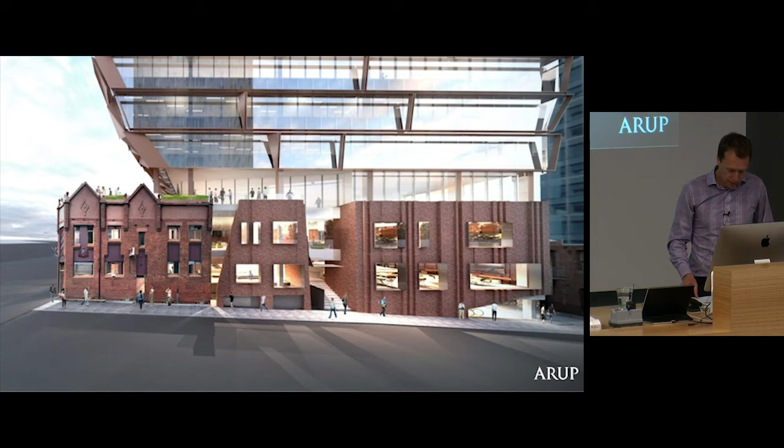So, what does a pub, a religious mission hall and a brothel have in common? That was the joke I was going to start with, but I'm not going to because I'm an engineer.

This is a corner of Melbourne in the 1800s, upon which stood the now heritage listed Elms Family Hotel, which was originally built in the 1850s as the old Governor Bourke. Next door is the heritage listed City Mission, originally a dance hall built in 1871, and behind those 17 Casselden Place, a former cottage and most likely brothel that is also heritage listed.

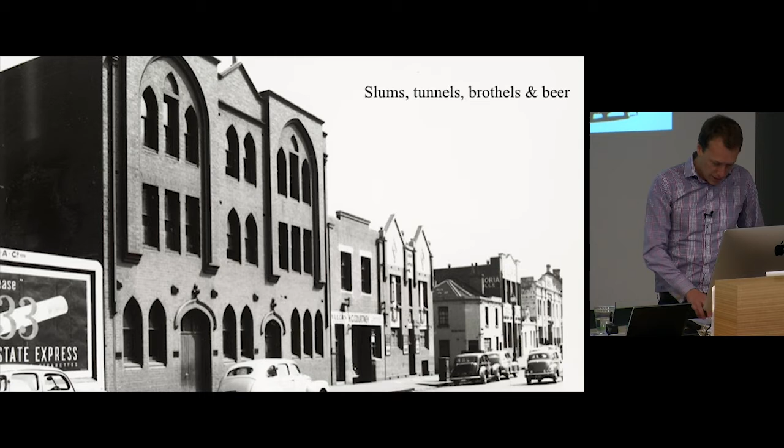They're all located on the corner of Melbourne City Grid, for those that aren't from Melbourne, up on the corner of Spring Street and Little Lonsdale, and those of us from Melbourne affectionately call the area Little Lon. So, it's a part of Melbourne's landscape that really is rich with history and tells a story of Melbourne through the last century. The subject buildings and laneways are considered the largest intact portion of Melbourne's notorious 19th century red light district, and we're in an area of substandard housing, poverty, brothels, hotels and workshops.

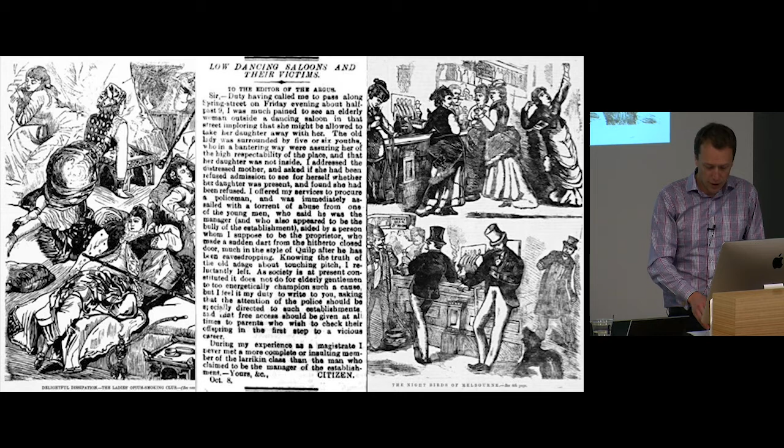Fast forward to our recent excavations, and thanks to engaged archaeological consultant GML Heritage, who carefully excavated the top metre of site, a lot of interesting things were found. Very old and once expensive champagne and wine bottles, coins, some Aboriginal artefacts, as well as all sorts of other interesting paraphernalia. I don't expect you can read this article, but if you can, it's a letter from a gentleman who had an altercation outside the now Mission Hall, trying to express concern for the welfare of the women inside and the daughter of a woman who was on the street trying to get her out.

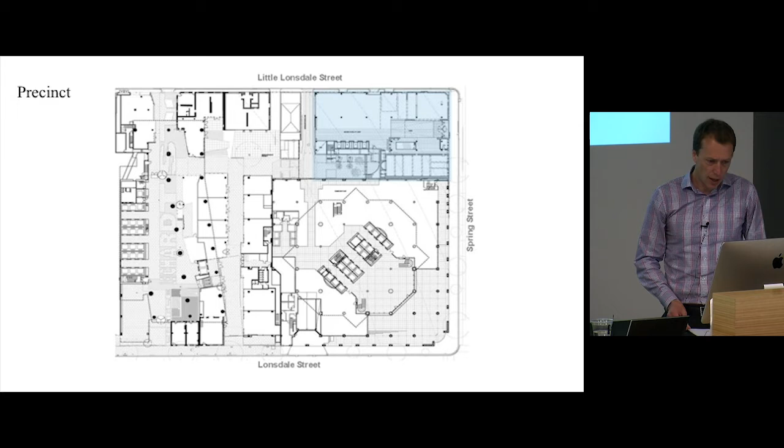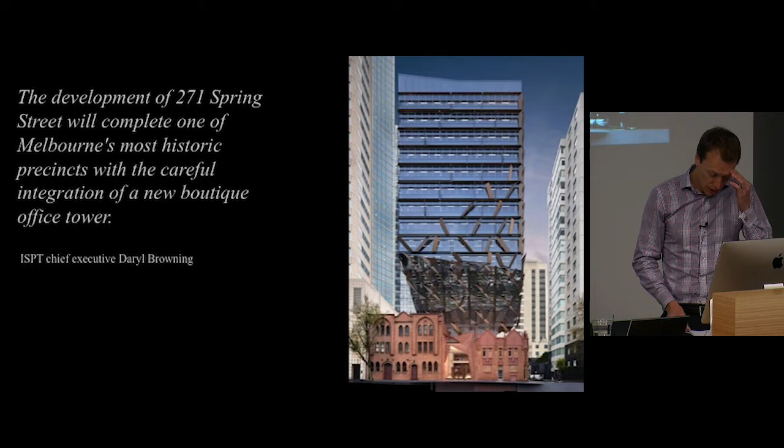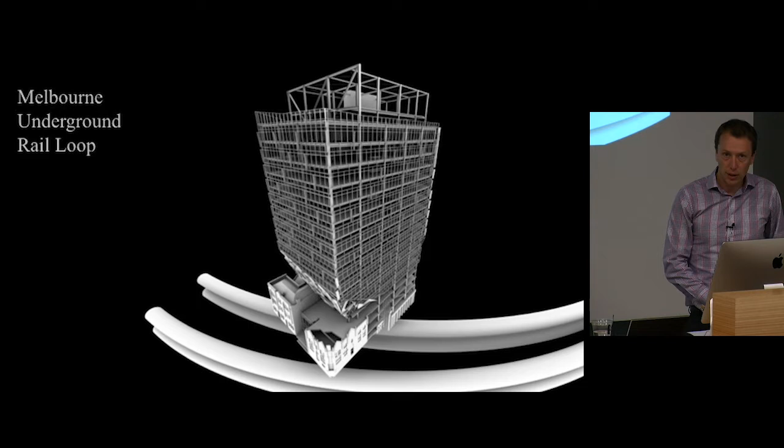This here is a sneak peek of where my presentation is headed. It's a render of the Spring Street elevation of the John Wardle and Arup collaboration, alongside heritage architects Bruce Trethowan, and encircled by the buildings that I've been discussing at the lower level. So, I've touched on the history and above ground built conditions, but with all the character above ground, why are you listening to a structural engineer? The answer is that there was a lot going on at ground level and below ground as well.

So, Melbourne's two alignments of double-stacked city loop underground rail tunnels, as you would have seen in the previous image, and I'll show you in plan, ran directly beneath the site. To top of tunnel, they're about 17 metres below natural grade. To top of the easement, about 10 metres, and when you go down into our basement, the easements are only 6 metres below us. There are 3 electrical easements, or 6 if you include the accesses over. There's a substation serving the precinct, 2 major conduit runs and the accesses over, and there are 2 rights of way as well. Alongside those, there are the existing heritage buildings that I've discussed.

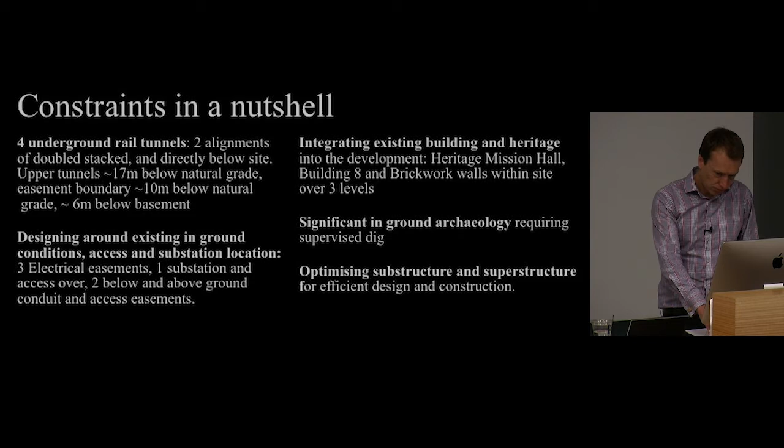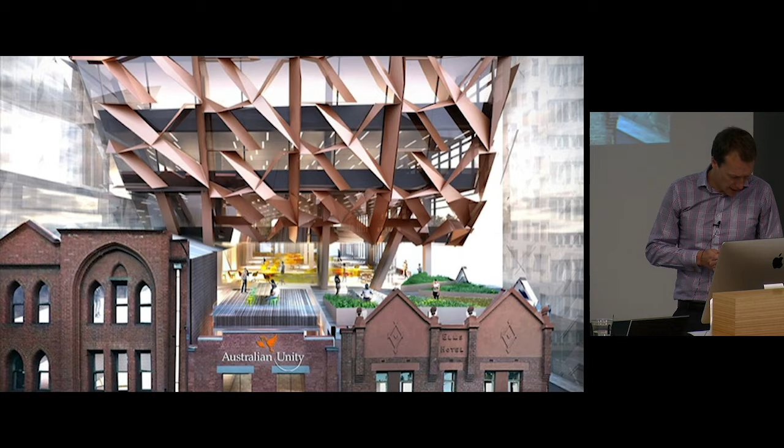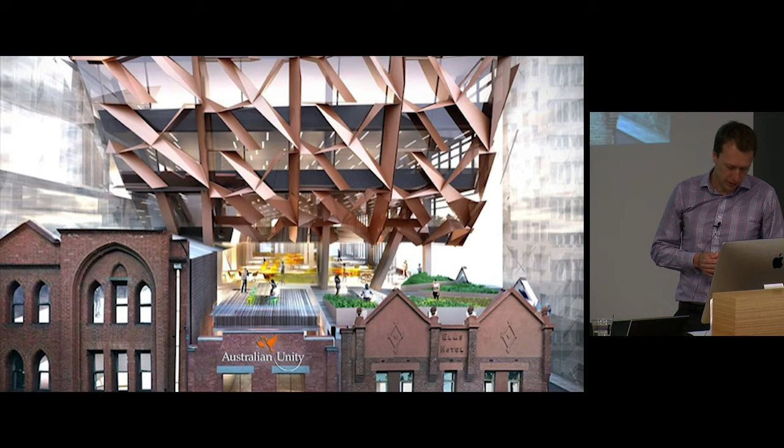So, it was in 2012 when Arup and ISPT first came together to discuss this development. ISPT had been working on the site for a number of years looking at various options, which for all sorts of reasons they hadn't been able to realise. It was at this point that we were fortunate enough to be given the opportunity by ISPT, and John Wardle Architects, to look at what an engineering-led solution might look like. So the question is, what did we actually do?

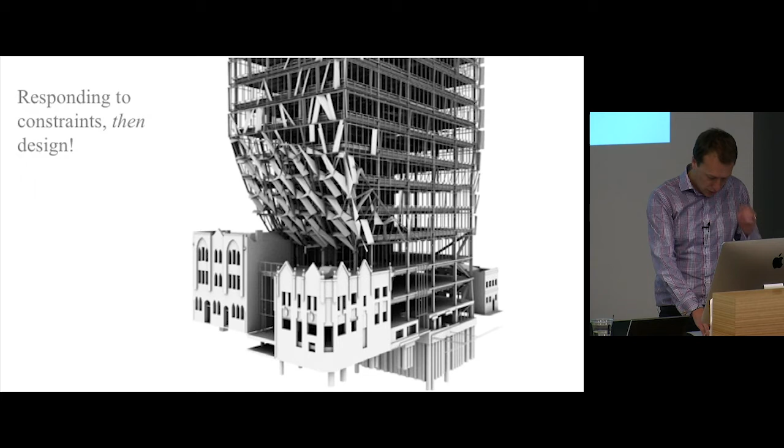So collaborating with our architectural friends, our aspiration was really simple on behalf of ISPT. It was to bring an approach to the project that would enable a development that was commercially viable, that could be built such that rents could be reasonable and they could find a tenant for a significant building on the site. Arup provided all engineering services: structural, civil, geotechnical, building services, facade, fire, ESD, acoustics, traffic and vertical transportation. So full suite of engineering services.

Our intent from the outset was to approach the consideration of structural and foundation solutions that would respond directly to the site's constraints and then inform the design. This is somewhat in contrast to perhaps a traditional approach in which a design solution is based on NLA, fit-out requirements or aesthetics and placed onto a site, let's say.

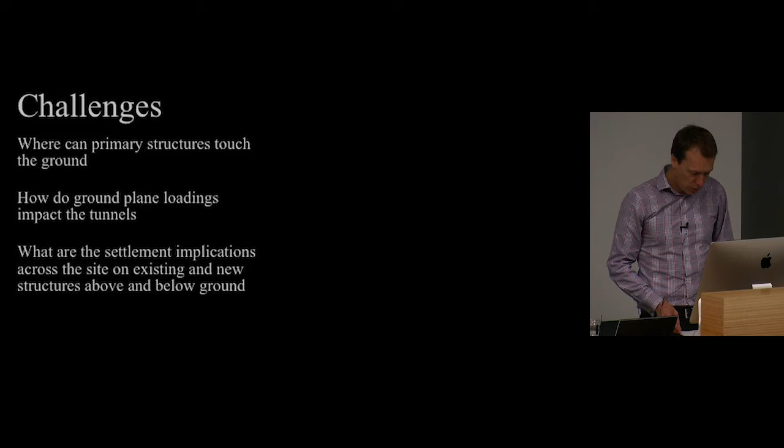So what were our challenges in structural and geotechnical terms? Where can primary structures touch the ground? How do ground plane loadings impact the tunnels in particular? And what were the settlement implications of the foundations we were putting down onto the ground, and what did that mean for the various heritage and brittle brickwork structures around us?

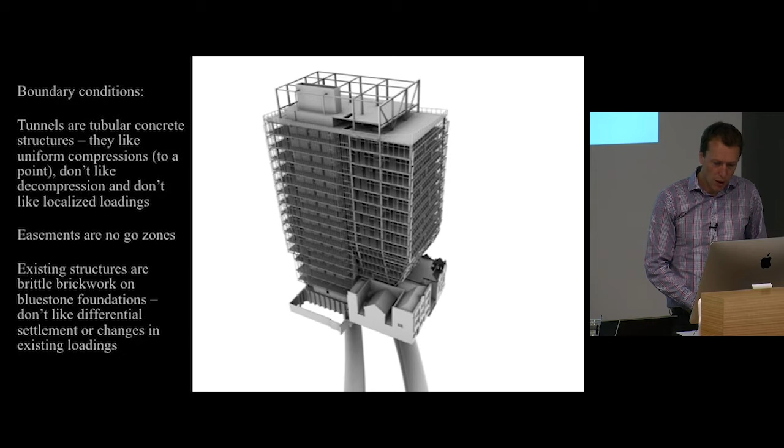To use a mathematical term, our approach was driven by these boundary conditions. Tunnels are tubular concrete structures. They like compression, they don't like decompression, and they don't like localised loads. Easements, as we know, are no-go zones, and existing structures, as I said, were the brittle brickwork on very old bluestone foundations, and they certainly don't like moving around.

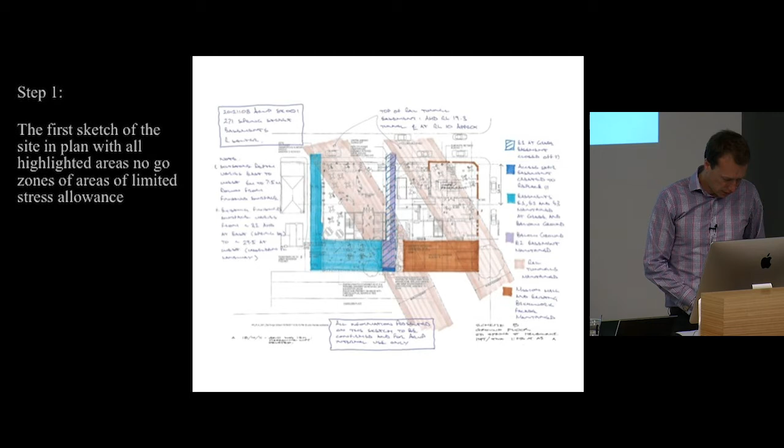We assessed the maximum and minimum stress that could be placed on the underground city loop tunnels. We identified and challenged the areas of the ground that we could and couldn't touch based on these easements, and we assessed and identified areas of ground and the site that we could and couldn't touch on the basis of heritage buildings, facades and archaeology.

This sketch looks pretty rudimentary, but I'm particularly proud of it because it was produced by me only a few days after we first opened discussions with ISPT, and it gives you a good indication of the constraints to the site. The site's bounded by the blue line on the left and the brown lines on the right.

The city mission is in the bottom right-hand corner, substation bottom left, easements running up the page in blue, heritage facades wrapping around, and the two city loop alignments diagonally running across the page. So that was our site, and you could see to some extent why it hadn't been developed previously. So the process was to be one of iterative optioneering of structural framing and foundation concepts that responded to these boundary conditions and constraints.

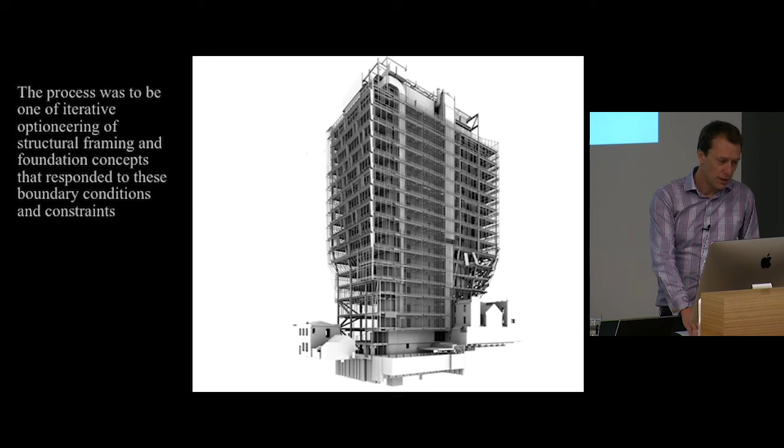An obvious consideration, but one that is sometimes overlooked in ensuring superstructure construction and norms are adhered to, is the self-weight of various construction types. The benefits obviously lie in reduced foundation extents, but are emphasised when it is imperative that ground pressures are minimised and limited founding locations are available.

This study led us to consider numerous options for the building's structural materiality. Traditional reinforced concrete at the heaviest end of the spectrum, lightweight concrete products, steel and timber at the other end. The impacts on various superstructure elements also needed to be carefully considered due to the requirement for raking structures and their associated kicking forces, as well as the need for transfers and open spaces, obviously at the lower levels.

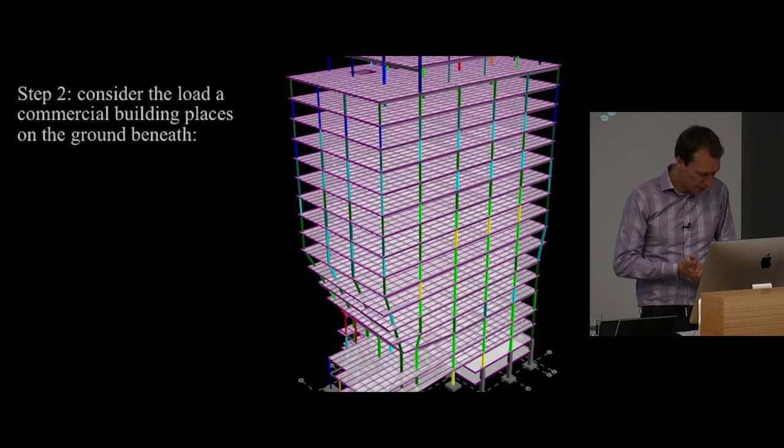We converged on a composite steel and concrete solution, combining relatively lightweight construction with buildable geometric flexibility and an ability to easily integrate bracing. If not considered carefully, the drawback of lighter weight construction, as the structural engineers in the room will know, can be acoustic and unwanted dynamic responses.

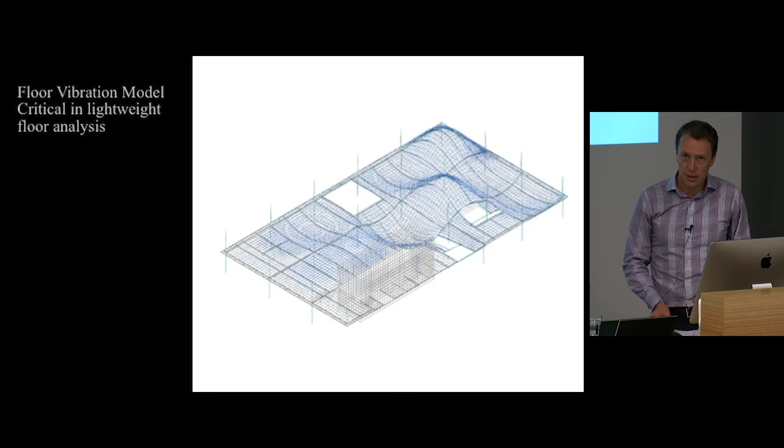Another part of this key decision on building construction type, materiality and form was the building's lateral stability and movement behaviours. At a high level, building importance level to the NCC is the governing factor in determining the natural wind and earthquake events that a building is to be designed for. This determination relates primarily to a building's use and population. For our building and its integration with heritage structures at low level, this needed some focus and agreement to ensure appropriate outcomes and enable optimisation.

To upgrade heritage buildings for current earthquake loadings is often impractical or can result in very poor architectural outcomes. For our heritage buildings, we proposed and ultimately agreed a lower level of importance and a further reduction to 67% of the applicable new equivalent building earthquake loads. This is considered in accordance with code guidance to protect life safety whilst enabling appropriate heritage outcomes post-strengthening.

It does, however, mean the heritage components must be isolated from the new building extent in a structural sense. The new building could then be considered in isolation as an importance level 3 building in common with the majority of large-scale buildings in our CBD.

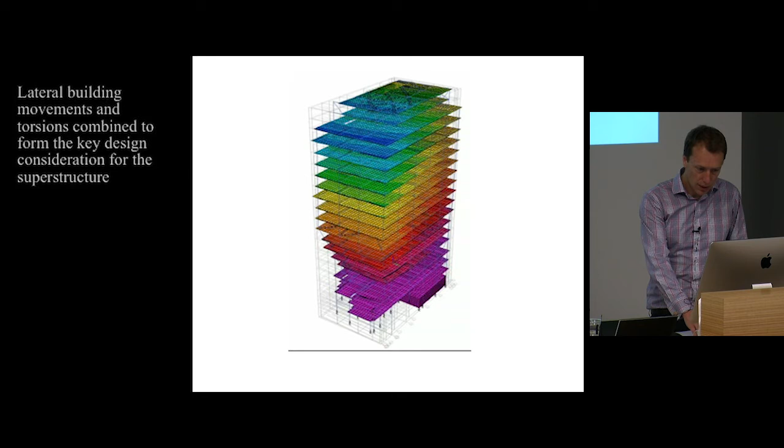So by this point, we were armed with the ability to establish the loads imparted by the building superstructure on the ground for any given geometry. This is hopefully where it gets a little bit more interesting for the structural engineers in the room. From here, we established techniques to assess and control the pressures exerted on ground zones by various superstructure options.

We did this by using springs to control the maximum and minimum stresses, as well as types of stress and loading that could be exerted on areas of the ground. And therefore, we're able to control the pressures on the tunnels below, adjacent below-ground substation, heritage foundations and easements.

This required careful iteration of superstructure, substructure and ground models and provided interesting results in relation to the superstructure's performance and load paths generated. Critically, it enabled us to understand where and which potential stability elements were going to be most effective and could be implemented within our constraints.

What that did was reverse engineer up the tower various stability options of where the load wanted to go. So we used meshes to establish where loads wanted to go in the superstructure. We could then assess where we should be putting walls and bracing, and we could propose that and work with our architectural friends to implement those.

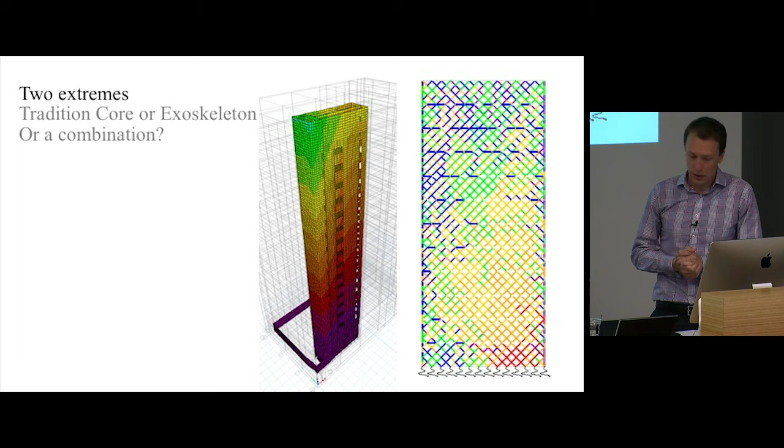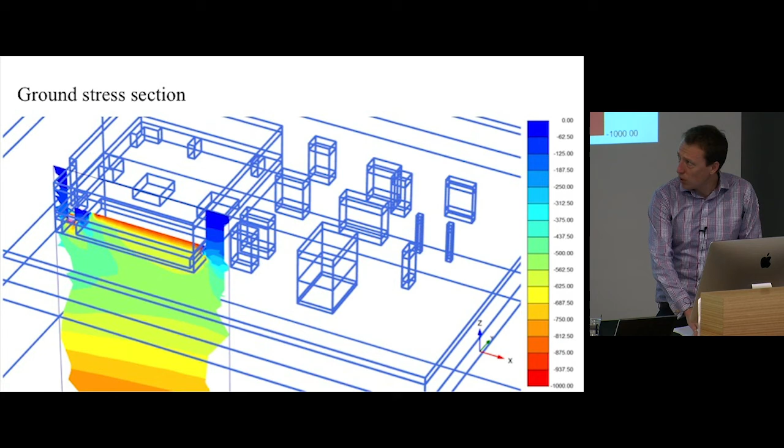So what about architecture? This whole process was a close collaboration with John Wardle Architects. Amongst many, there were two clear architectural and heritage geometric constraints that we needed to address. Both required substantial rakes or cantilevers within the building's facade and thus vertical elements, and came as a result of heritage sensitivities over the Elms Hotel and a need to achieve a practical floor plate above the constrained ground plane and buildings. Critically, these prohibited the ability to establish a primary stability structure on the eastern facade and meant that the already spatially constrained side core could not all be taken to ground.

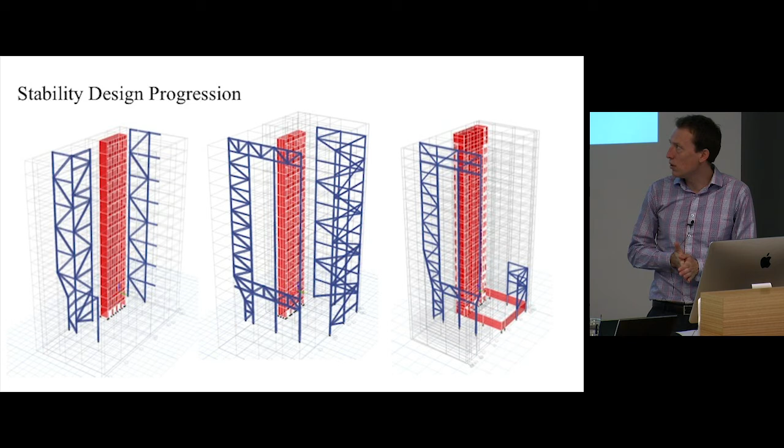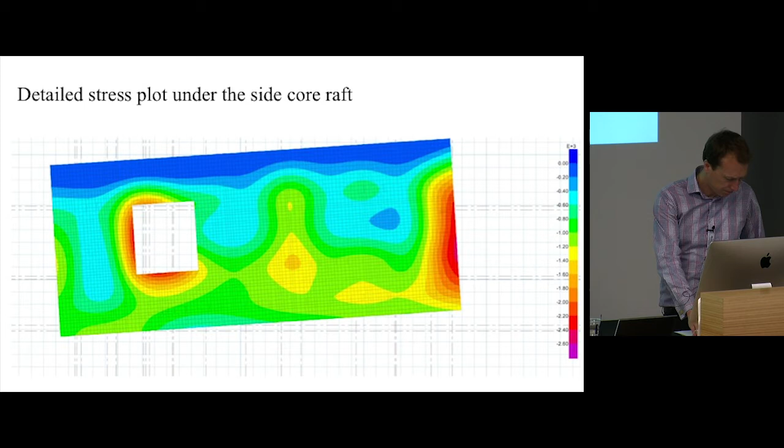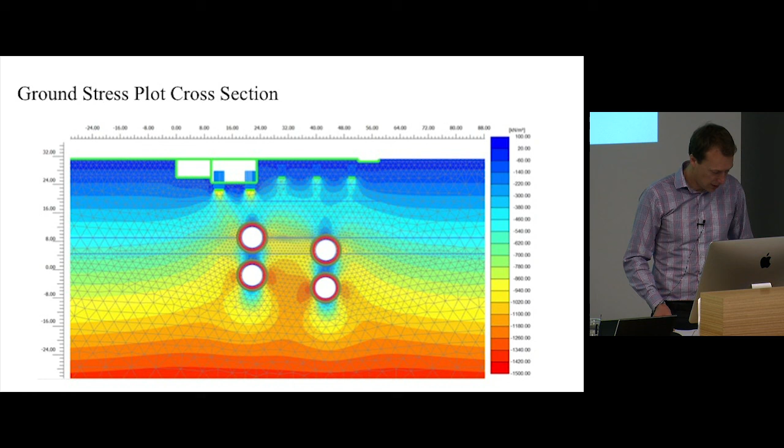Final technical consideration was the basement excavation, which proved to be one of the most critical tunnel stress considerations. The unloading of circular tunnel structures like this can result in elongation vertically, which results in tensile forces in the circular structures.

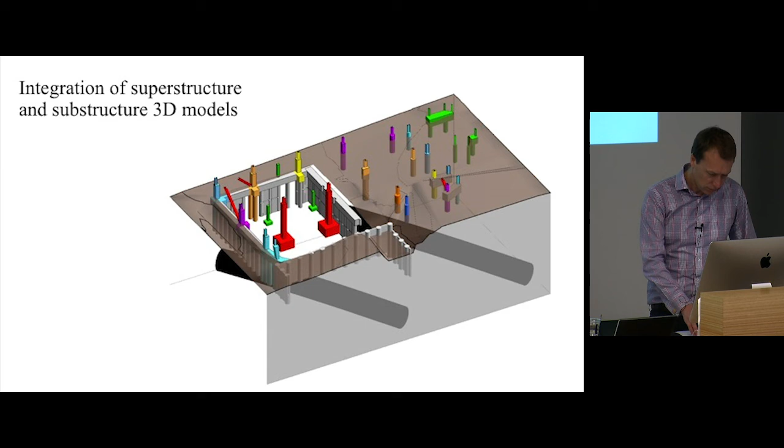Through our innovative analysis, an intelligent, coordinated, readily constructible solution was achieved. We managed to design a building that was of a sufficient scale to yield a level of rent that would ultimately enable the building to stack up commercially. 15,000 square metres of NLA in a side-core 16-level office building that is now fully let. All of this was a close collaboration with ISPT, John Wardle Architects, Bruce Trethowan, Heritage Architects, RCP project managers, Rider Levett Bucknall, Urbis, and now ProBuild Constructions.

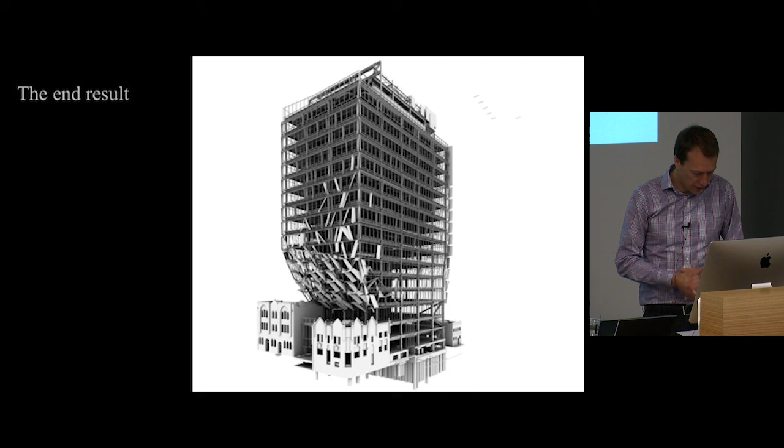The scheme combines integrated facade, rooftop and superstructure bracing elements to side core and shallow foundations to successfully facilitate an architecturally stunning building with a multi-purpose floor plate in a sensitive urban environment. The design maximises floor plates and creates opportunities for new contemporary workplaces. It integrates the lower floors with the heritage buildings and includes an outdoor garden mezzanine to assist with the break between the superstructure and the heritage.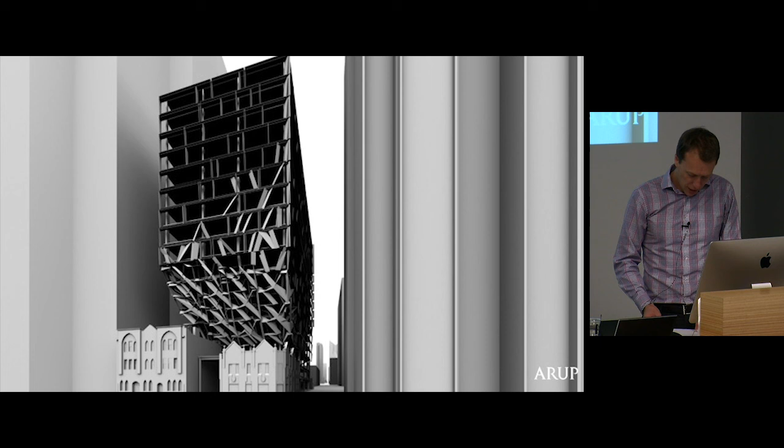It facilitates horizontal and vertical connectivity for improved team-based collaboration and performance. On a site that had lain undeveloped for many years, Arup and our collaborators have successfully realised this fantastic development through well-considered and intelligent site-specific engineering and architecture.